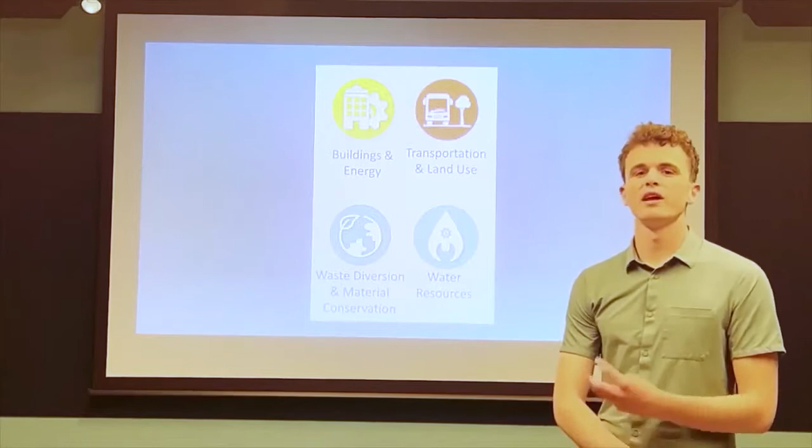And lastly, using our immense brain power to compile our experiences into various detailed written reports. These reports, available to you, describe our experiences here and highlight different ways we think that we could possibly improve Spokane's Sustainable Action Plan. My classmates and I divided ourselves into various groups, which each tackled the 4 areas of Spokane's Sustainable Action Plan: buildings and energy, transportation and land use, waste diversion, and water use resources, comparing our different learnings here to our areas of action.

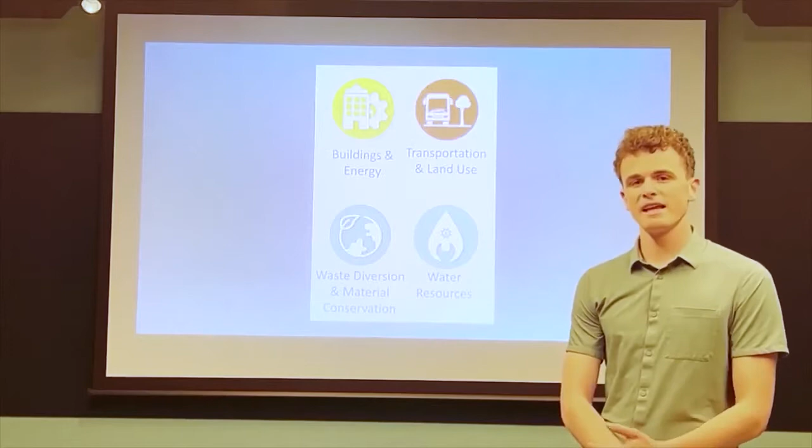In this presentation, my classmates and I will summarize their various subjects, and again, see our reports for the full details. And first, we're going to build off with buildings and energy.

We are the Buildings and Energy Group, presenting to you today on 3 of our 4 proposed approaches towards the Spokane Sustainability Action Plan. Our first approach is modular construction associated with Goal 1 and Strategy 1. The second approach is retrofitting and repurposing buildings associated with Goal 1 and Strategy 2. The third approach is green roofs and facades associated with Goal 1 and Strategy 2. The fourth and final approach, which we will not be presenting today, is Sustainability Hub for Entrepreneurs associated with Goal 3 and Strategy 6. Thank you very much.

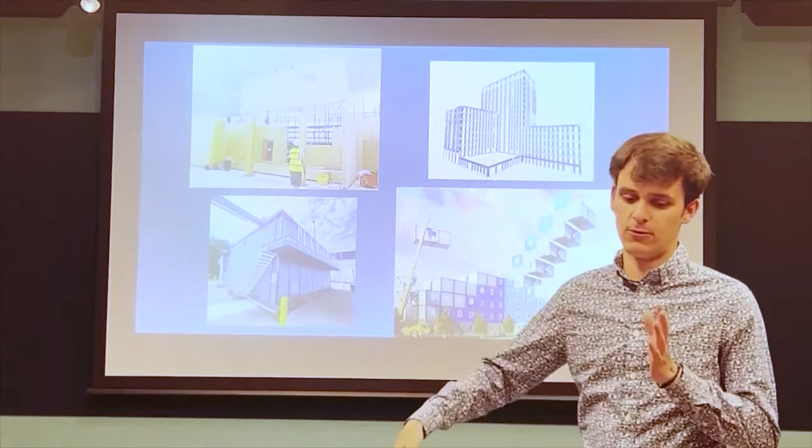One of the approaches that we tackled was modular construction. Modular construction is a building method where components are constructed off-site and then transported on-site, where they're installed individually. This saves a lot of time as it adopts a non-linear construction method, which allows multiple parts of the construction to occur at the same time, both on-site and off-site.

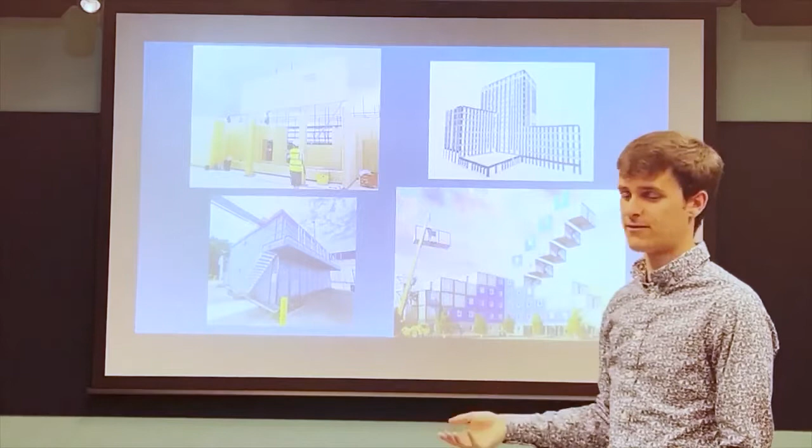It also reduces end-of-life waste, as many of the components are able to be deconstructed and then reused in the future. This can take form in a variety of ways, such as CLT and even shipping containers. The image on the bottom left is actually part of the wastewater treatment plant that we saw at a city here on our trip in the Netherlands. Inside of it, it is used to house heating coils, which is part of the way they convert waste into methane to be reused as natural gas.

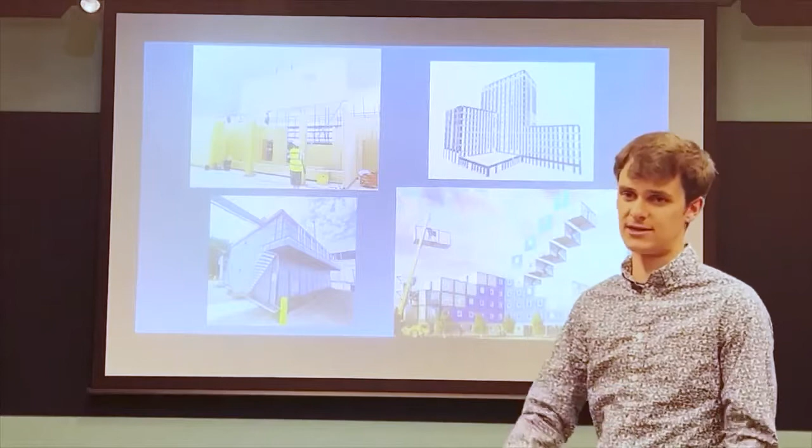Retrofitting and repurposing of existing buildings is a major component in accomplishing a low carbon and energy efficient future. Efficiency retrofits have an immense impact on the amount of emissions and energy consumption from a building. So improving what already exists should be a priority instead of using more resources by demolishing and starting from scratch.

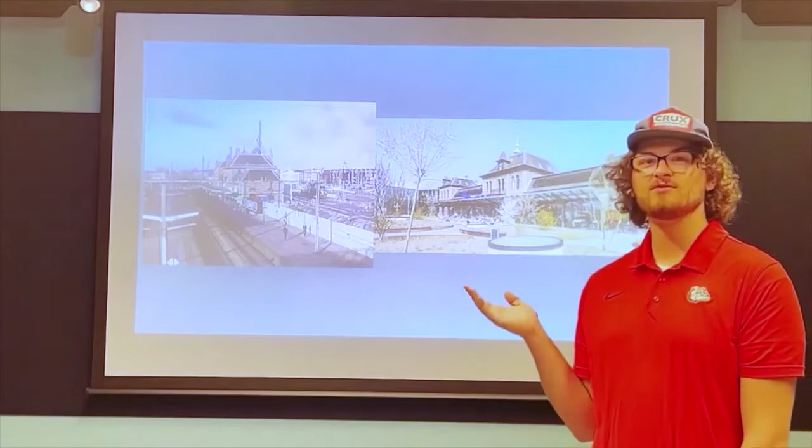For example, in Delft, the old central train station has been repurposed as a multi-use facility with offices, shops, and even a restaurant. Spokane can meet the carbon level goals stated in the action plan by encouraging and incentivizing the reuse and retrofitting of what already exists in our beautiful city.

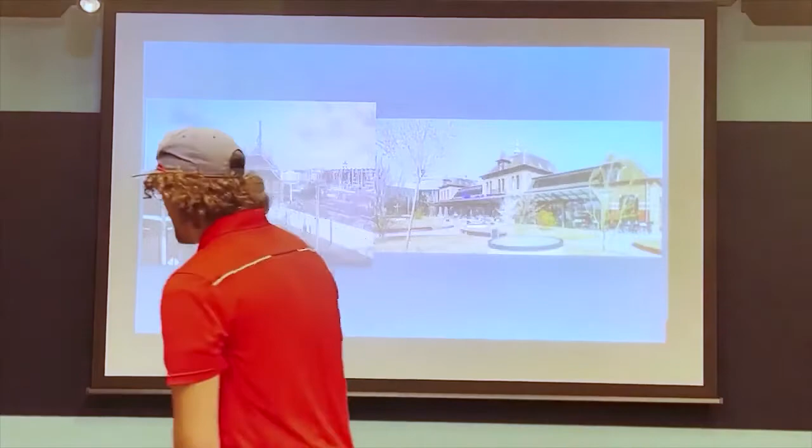Green roofs and facades also help to reduce the heat island effect seen in cities by using vegetation instead of asphalt paneling or tiles, and the vegetation actually absorbs the heat while the asphalt reflects it. This will help to reduce the risks of heat-related health problems.

If you'd like to read more about any of these strategies, you can see them in our final paper. And now we will cycle over to transportation.

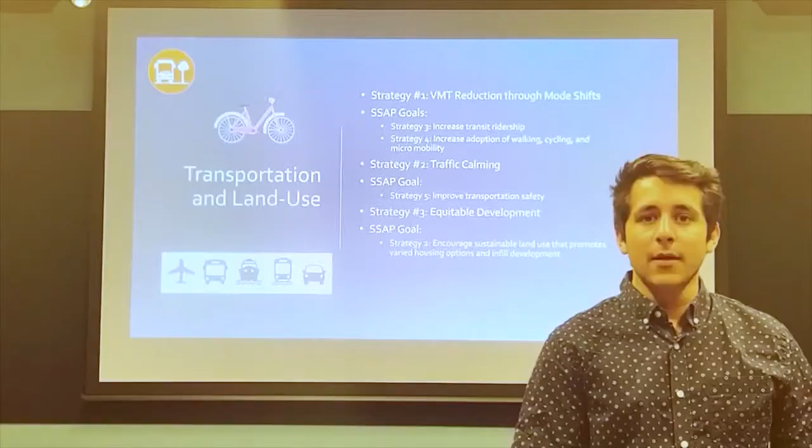Hello everyone, we are here to present to you about transportation and land use and its relation to sustainability within Spokane. We are going to talk about 3 main points today.

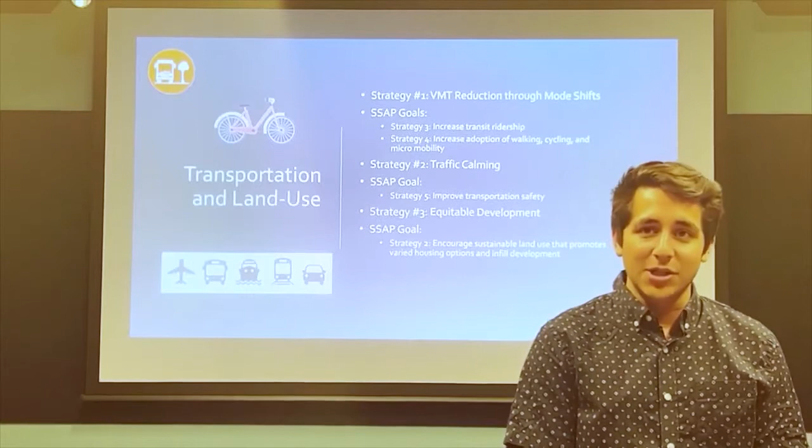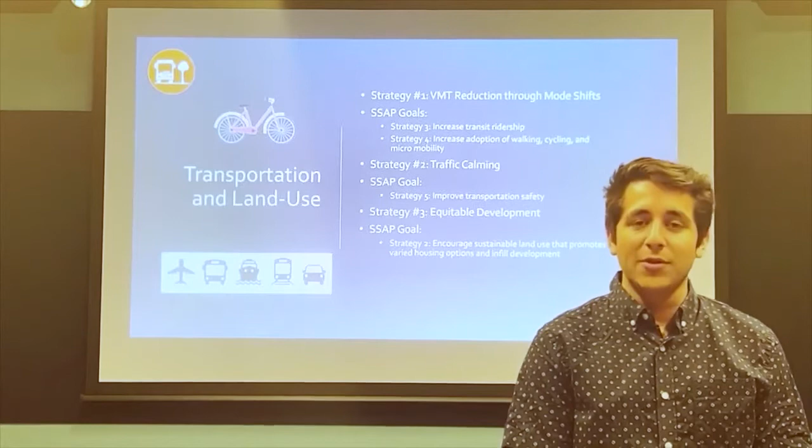To start, we're going to talk about vehicle miles traveled in relation to the reduction of them through mode shifts. This relates to the Spokane Sustainability Action Plan goals of increasing transit ridership and also increasing the adoption of walking, cycling, and micromobility. Along with this, we're going to talk about the strategy of traffic calming, and this relates to the goal from Spokane Sustainability Action Plan of improving transportation safety. And finally, we're going to talk about the last strategy of equitable development, and this focuses on the goal from the Sustainability Action Plan of encouraging sustainable land use that promotes varied housing options and infill development. We hope you can learn of the relation of transportation and land use and the sustainability practices of Spokane.

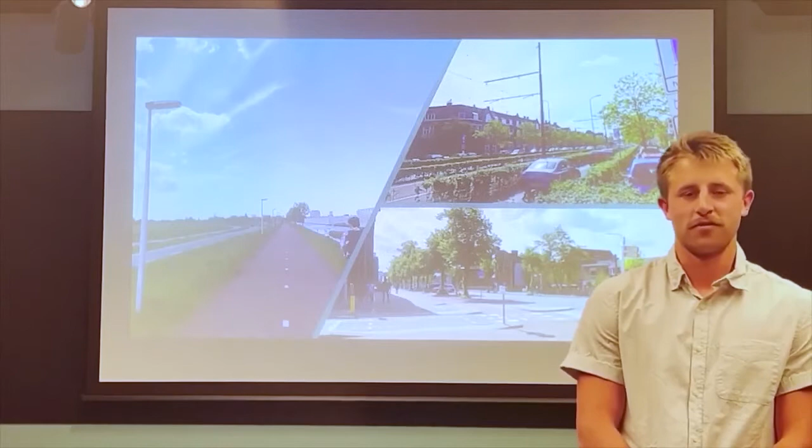An important factor that influences the use of active transportation is safety, both perceived and actual safety. The Netherlands integrates traffic calming measures into their streets, and in my time here, I've noticed that I feel safe walking and cycling into my destination. This is a picture of a street in Delft.

It's in a mixed-use neighborhood, and there's 2 lanes, and it has a dividing center cobble median, and the lanes are narrow, which encourage drivers to go slowly, and the bike paths are buffered with trees and parking for cars. This is just one way that the Dutch promote walking and cycling and make the users feel safe. And this is a strategy that Spokane can use to further their goal of promoting active transportation and also increasing traffic safety.

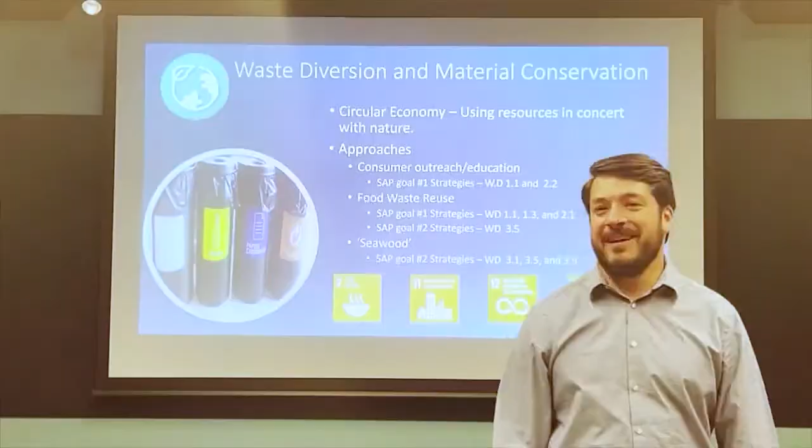Waste diversion and materials conservation is important to define what a circular economy is. In real layman's terms, circular economy is using materials in concert with nature, but that requires 2 things. First, viewing waste as a resource, and 2, planning on a way to incorporate that resource when you make the product.

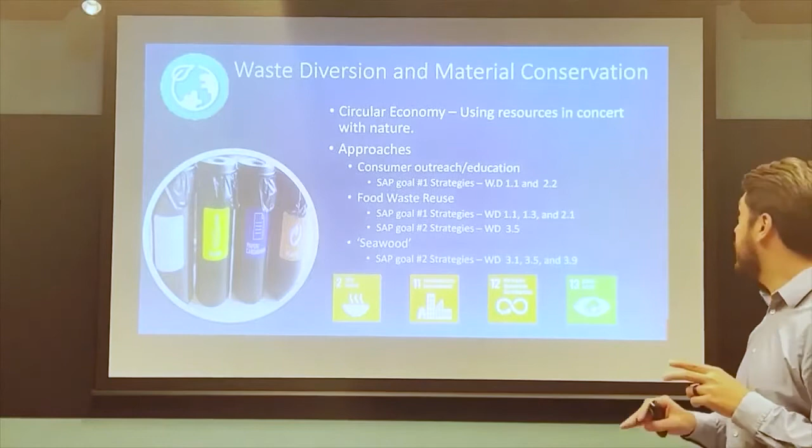We're going to use 3 approaches: consumer outreach, food waste reuse, and an innovative product called Seawood that we found here in the Netherlands to address the Spokane Action Plan's 2 main goals for waste diversion and material conservation. Okay, next up we're going to talk about consumer outreach.

Reduction of waste helps save money and resources, while recycling allows for these resources to be reused again, and compost allows for reuse in fertilizers and in agricultural spaces. By changing these habits we can create more solidarity, save money, and reuse and recycle.

Up next is a strategy that further explores food waste and compost. Food waste is most commonly repurposed through composting. Some scraps can be reused directly, such as coffee grounds, which a company in the Netherlands uses to grow mushrooms.

Getting water-rich foods out of the waste stream decreases the amount of energy consumed by the waste energy plant, and the food acts as a fertilizer, decreasing food production cost and increasing the quality of life with cheaper food. Using the waste material makes an economic gain out of a societal hindrance, and the business model has been proven to work.